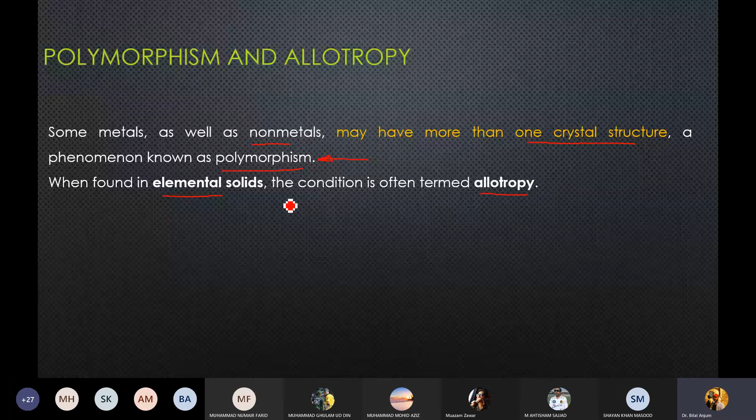So if you have an alloy having more than one crystal structure, you refer to it as polymorphism. And when you have elemental solids having more than one crystal structure, you refer to the phenomenon as allotropy. For instance, the example of carbon.

Carbon, depending upon the temperature and external pressure, could have the crystal structure in the form of graphite, which is a stable polymorph at ambient conditions, that means room temperature and pressure, whereas the same carbon, which is an elemental material, could have an allotrope known as diamond, and it is formed at extremely high pressures. That means a different crystal structure known as diamond, which is being formed at higher pressures.

So you should have an understanding of the fact that materials could have different crystal structures for the same chemical composition, and this dependency of crystal structure is dominated by the temperature and the external pressure. So if you vary the temperature or the external pressure, you could have the same material having different crystal structures.

For instance, the example of carbon, or if you consider steel, which is an alloy, steel has BCC crystal structure, body centered cubic crystal structure at room temperature. The same steel could have an FCC crystal structure if you raise the temperature approximately above 800 degrees centigrade.

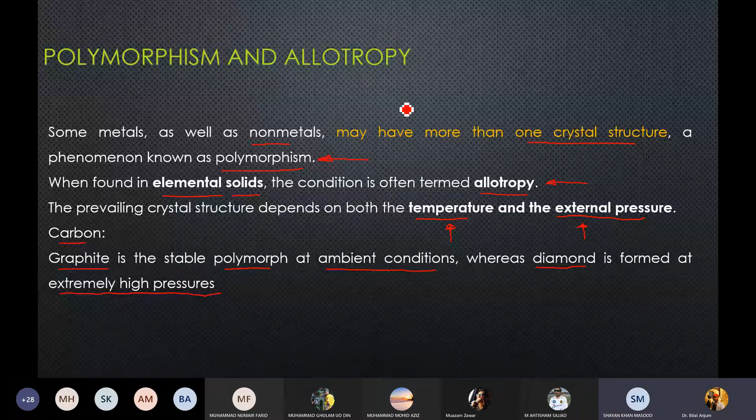Now, moving on towards crystal systems. Crystal systems basically define the geometric arrangement. It says that there are many different possible crystal structures, and it is convenient for us to divide them into groups according to the unit cell configurations or atomic arrangements. We'll focus primarily on unit cell configurations at the moment.

Based on the unit cell geometry and without regard to the atomic positions in that geometry, we can divide the crystal systems into seven major crystal systems, and these crystal systems are defined by the dimensions A, B, and C, and the angles alpha, beta, and gamma. That means the complete geometry of a crystal system can be defined by these six lattice parameters. Lattice parameters A, B, and C, and the angles alpha, beta, and gamma.

For example, a cube would have the same dimensions, A would be equivalent to B, which would be equivalent to C, and alpha, beta, and gamma would essentially be 90 degrees. So this is the configuration of lattice parameters for a cube. You have several different options available, or several different geometric arrangements are also possible.

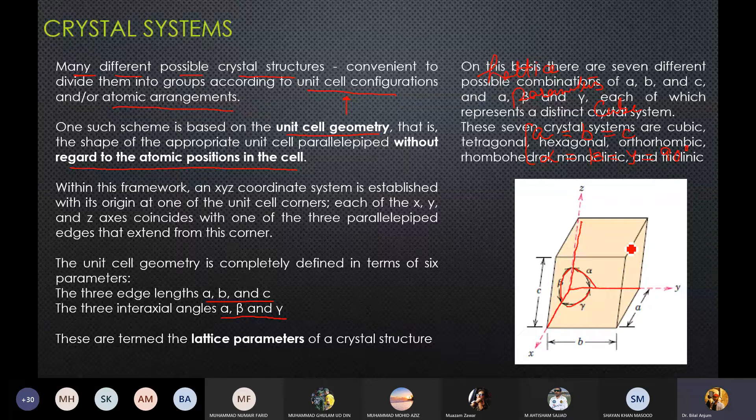Now, if you talk about A, B, and C, A is the length along the x-axis, B is the length along the y-axis, and C is the length along the z-axis. Similarly, alpha is the angle between the YZ plane, beta is the angle between the x and z axes, and gamma is the angle between the xy axes, and it is on the xy plane. So these six lattice parameters, the dimensions and the angles, define the unit cell geometry.

Now, you should know that this is the geometric configuration. You have cubic, hexagonal, tetragonal, rhombohedral, orthorhombic, monoclinic, and triclinic geometric arrangements defining the crystal systems. Within this cubic system, you could have FCC, you could have BCC. FCC and BCC basically define the atomic positions. These seven crystal systems are without any regard to the atomic arrangements. But they can further be divided into FCC and BCC depending upon the atomic arrangement within this cubic unit cell.

From the point of view of this course, since we are focusing on metals only, you would be interested in cubic geometry and hexagonal geometry only, because metals normally follow either the cubic geometry or the hexagonal geometry. They could fall in the domain of FCC, BCC, or they could fall in the domain of HCP, which is hexagonal close packed crystal structure. I hope this is clear to you.

Yes, sir. All right, moving on.

The important aspects that we would be looking into are crystallographic directions and crystallographic planes. How do you identify a direction in a unit cell, how do you identify planes in a unit cell, and how do you represent them? So we'll be looking into crystallographic directions first, and probably next week we'll start with crystallographic planes.

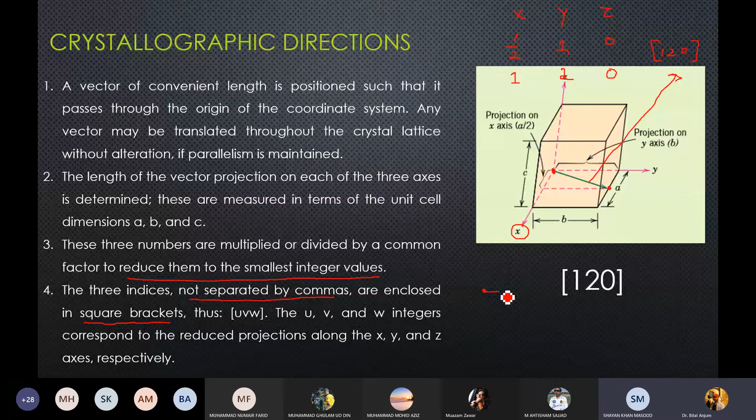We'll come to that. Don't worry about it. Hexagonal, we'll come to that. So far, is it clear?

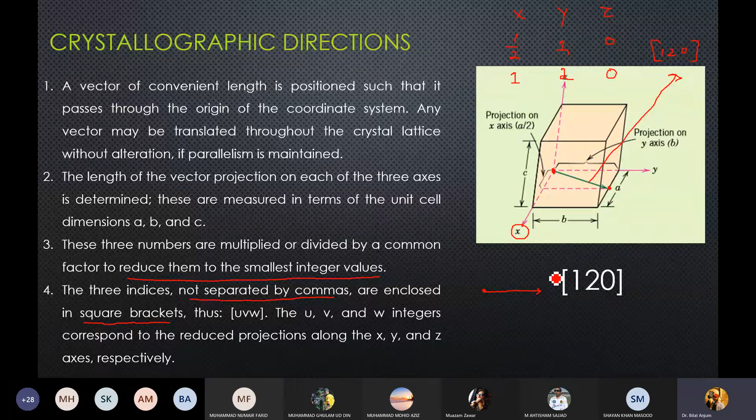Yes, sir. All right. Now moving on, there are certain things that you need to know about the crystallographic directions. That means for each of the three axes, there will exist both positive and negative coordinates. The negative indices are also possible, which are represented by a bar over the appropriate index. So if you have to represent the movement along the negative direction, you would represent it by a bar on top of the integer. For example, 1, 1 bar, 0 direction would have a component in the negative y direction. Clear enough? This 1 bar would represent the movement in the negative y direction.

Yes, sir. Third thing is also changing the sign of all indices produces an anti-parallel direction. For example, 1 bar, 1 bar, 1 bar is directly opposite to the triple 1 direction. For instance, this is the 1 bar, 1 bar, 1 bar direction. An exact opposite direction would be in this negative direction. Obviously, it is in 3D, so you would have to make use of your imagination. 1 bar, 1 bar, 1 bar would be an exact opposite direction. I hope this is clear to you.

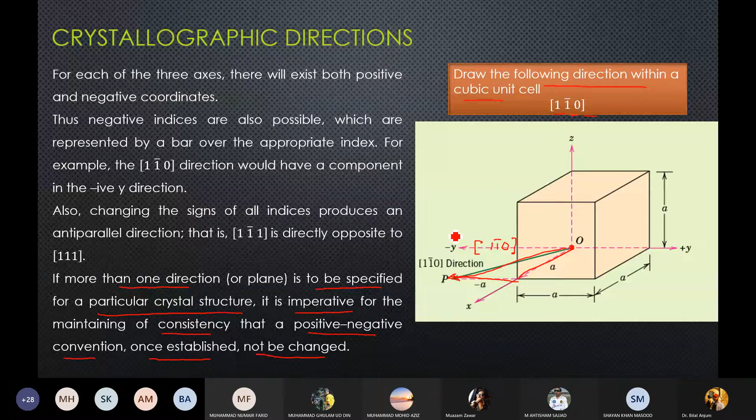Yes, sir. All right. Moving on, there are certain things that you need to know: for some crystal structures, several non-parallel directions with different indices are crystallographically equivalent. That means the spacing of atoms along each direction is the same. For instance, I have this cube with me, and let's say this is a BCC crystal structure where 8 atoms are there at every corner, and there is one atom within the center.

Now, my positive y direction is this, my positive z direction is this, and my positive x direction is this. If I have this direction, it is essentially the 1, 0, 0 direction. Similarly, this direction is essentially the 0, 1, 0 direction. Or let's say this direction is essentially the 0, 0, 1 direction. Now, if I see all the three directions, do they have the same lengths, since we are talking about a cube? Yes, sir.

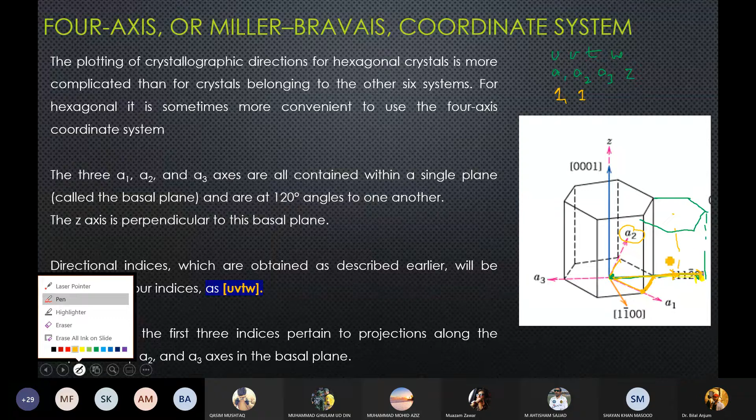Or no. For example, just give me a minute. It is still the edge. If you see, I have moved from here to here. How much? U V T W, A1 A2 A3 and Z. All right. From here to here, I have moved 1 unit. Yes, sir. From here to here, I have moved 1 unit.

Now from this point, how much do I have to move in this direction to get to the edge? Sir, 2 points. So that would be +2 or -2? Sir, opposite है तो -2 होगा. -2. And how much on the z-axis? Sir, 0. So you'll have the indices as 1, 1, -2 bar, 0. Clear? Yes, sir, clear.

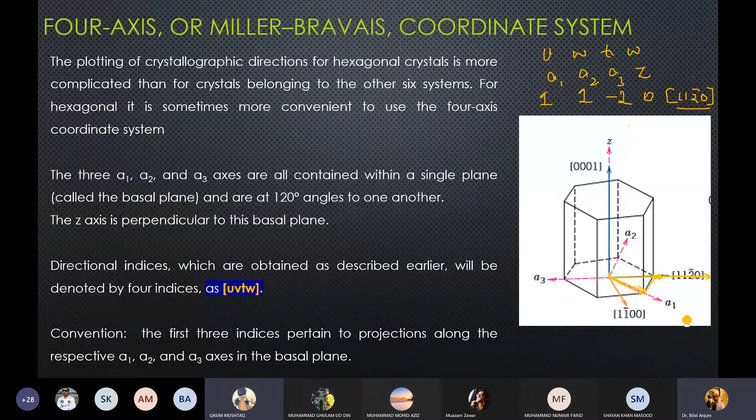Alright. Now there are times that you could have 3 indices for HCP also. How do you convert these 3 indices to a 4 index system? The 4 index system is shown to you over here. Essentially the length along A1 is subdivided into three portions. This is 1/3 of A1. This is 2/3 of A1. And this is one complete step along A1. Clear?

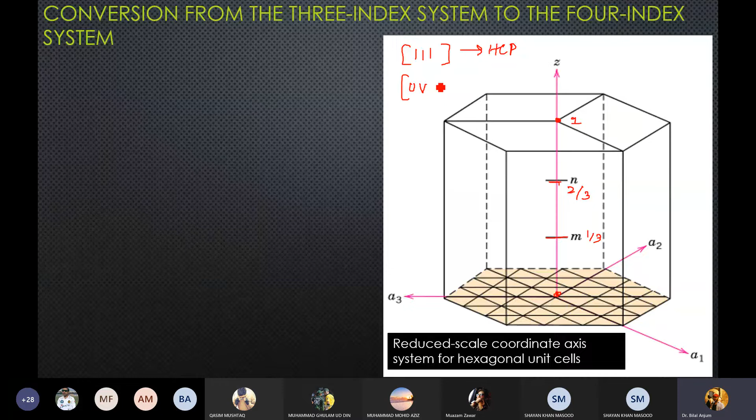Great. So if you have three indices given to you, let's say 111 for HCP, and you have to convert it into UVTW, the 4-index system, or the reduced coordinate system. This A1, A2, A3, and Z-based coordinate system is known as the reduced scale coordinate axis system. The 4 indices system is known as the reduced scale coordinate axis system for HCP.

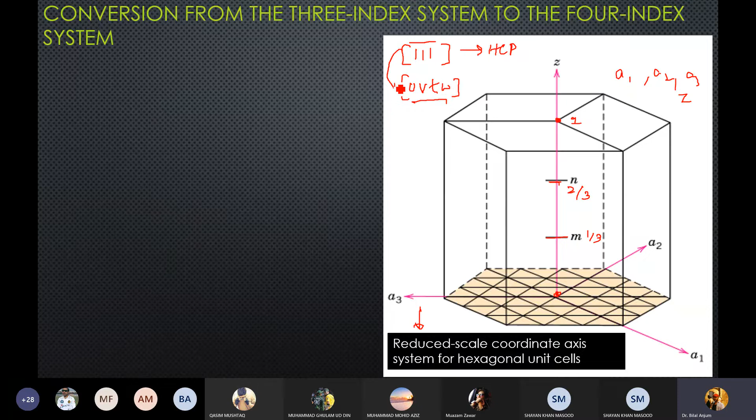So if you want to convert the normal 3 indices to the reduced scale coordinate axis system, you can use this conversion to convert it into UVTW indices. W, the movement along Z, would remain the same. It is essentially U, V, and T that are dependent upon U bar and V bar, the first 2 indices. Clear enough? जी सर.

Let's have a look at an example. So let's say I have a direction known as the 111 direction; U bar, V bar, and W bar are the common directions that you are familiar with. And you want to convert it into the 4-index system for the hexagonal crystal system, the reduced scale coordinate axis system. How do you do that?

You just plug in the values of U bar and V bar for U, and you'll get 1/3. Similarly for V, you plug in V bar and U bar and you'll get 1/3. For T, it is the sum of U plus V with a negative sign, so this would be -2/3. And W would be the same as W bar, which is 1. So now you have converted this 3 indices system into the reduced axis system. Clear?

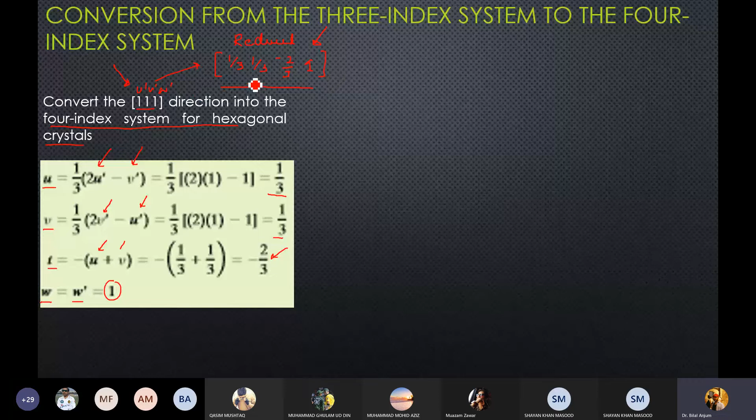Reduced scale coordinate axis systems. Sorry. So now we'll try to plot both using the 4-index system, which is the reduced scale coordinate axis system, and the normal indices, the 3-index system, to find out the 111 direction or this reduced scale direction. They should essentially be the same direction. So first, let's use the reduced system. In the reduced system, I have these directions.

In the reduced scale coordinate axis system, I have 1/3, 1/3, -2/3, and 1 as the indices. So let's try to draw this direction. This is represented by U, V, T, W, or A1, A2, A3, and Z. So if I have to move 1/3 on the A1 axis, I'll have to move from here to here. Clear? Yes, sir. Now, if I have to move 1/3 on the A2 axis, where should I go?

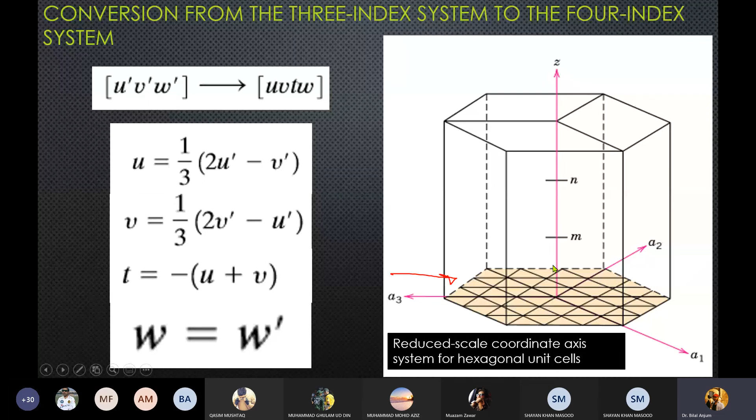One more thing. One of you asked me a question regarding the AISI nomenclature. Who was he?